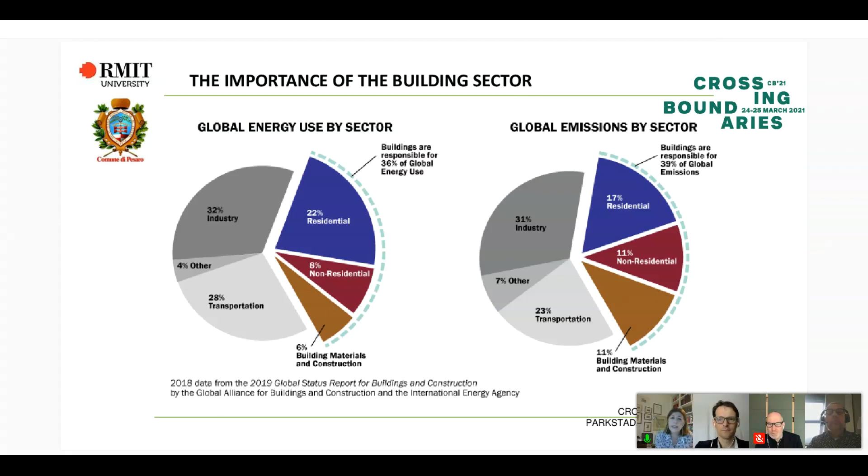Let me give you only some numbers. The building sector alone accounts for 36% of the total amount of energy used, and consequently the building sector is responsible for 39% of total global emissions.

In Europe, the final energy used in the building sector is about 35%, and based on the report of a Copenhagen Research Institute, you can see on the right, in yellow, the building sector's distribution of raw materials consumption, measured in million tons in EU countries. Italy comes only after Spain, Germany, and France.

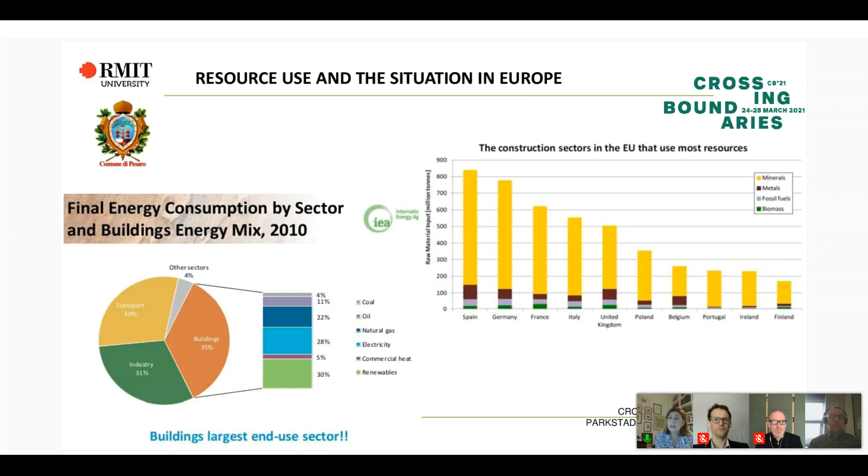With about more than 550 million tons, and furthermore, rising living standards and population growth will push the use of raw materials to unprecedented levels in the coming decades. According to projections from the OECD report published in February 2019, the use of sand, gravel, and rock will nearly double by 2060. Over half of all current greenhouse gas emissions are related to materials management activities.

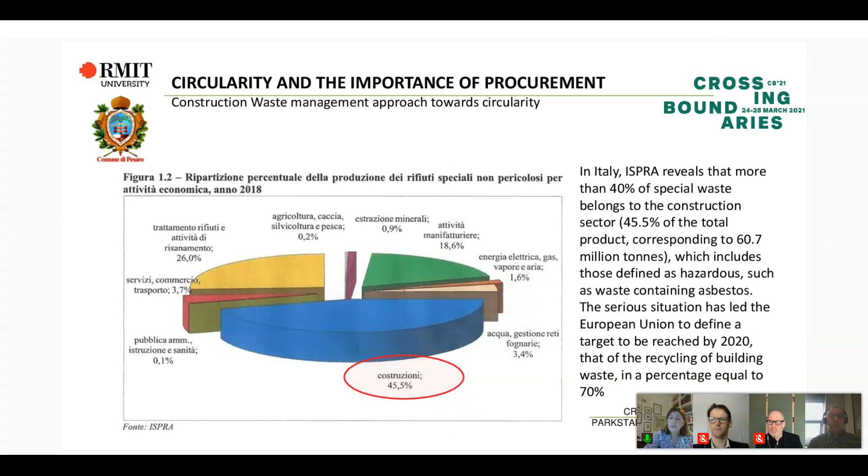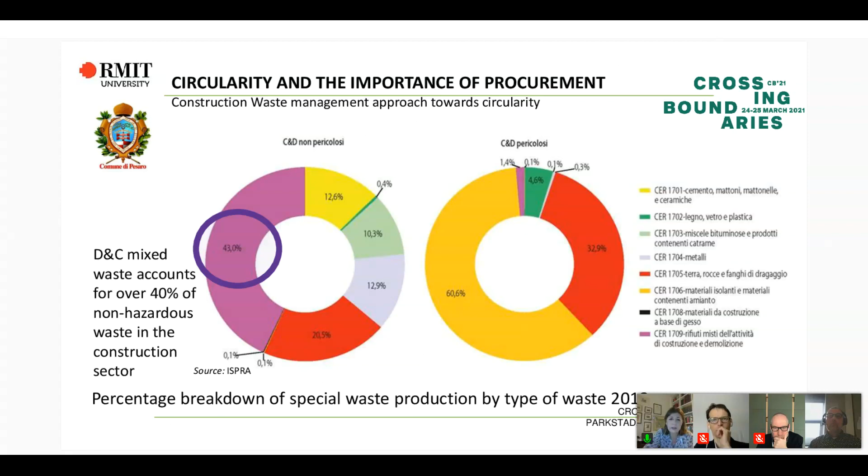In our case study, we did not simply apply waste reduction or maximized recycling, but applied the principles of the circular economy, developing waste management to trigger a process of control and monitoring of all materials and waste during the construction phase. Our research showed that changing the traditional approach in green public procurement can obtain significant results, adopting a more circular approach based on thorough analysis and environmental claims, to achieve not only energy efficiency but circular buildings with low environmental impact.

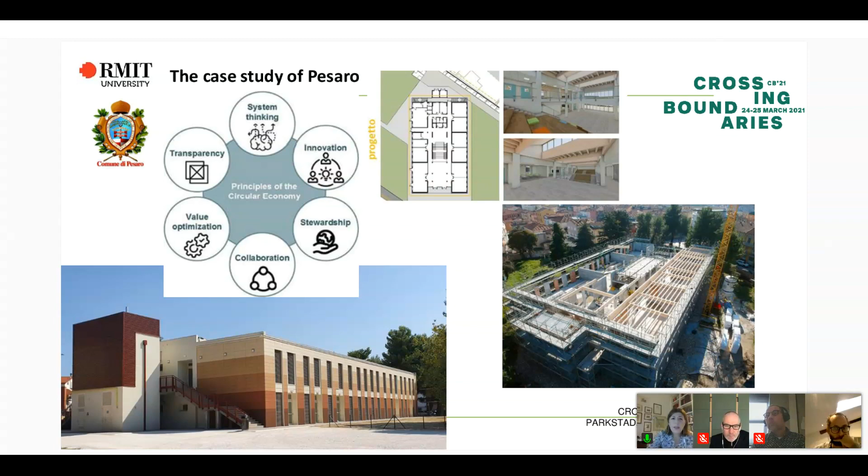So the aim of this project is to go beyond resource efficient use and cleaner production since the design phase, during the construction phase, and based on the tendering process. What's more important is that the call for tender describes a clear technical specification and provides measurable requirements against which the tenders can be evaluated.

Performance-based criteria describe the expected results, which outputs are mandatory. In the case of this project, two main criteria were selected as mandatory: first, obtaining a near zero energy building school, and second, providing environmental energy certification using the LEED scheme, achieving at minimum LEED gold certification. This is the first Italian project that approached GPP with a clear, ambitious request of environmental criteria.

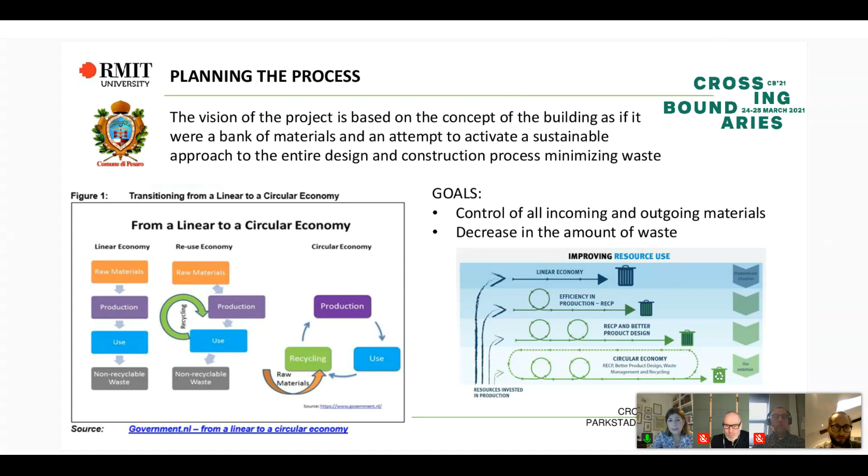As regards waste materials, the strategy was developed by controlling all incoming and outgoing materials from the construction site. The importance of the green public procurement was to make mandatory the obligation to deliver all materials from demolition to a recycling center, and also provide not only certificates proving the quantities delivered to the recycle center, but also the quantities recycled.

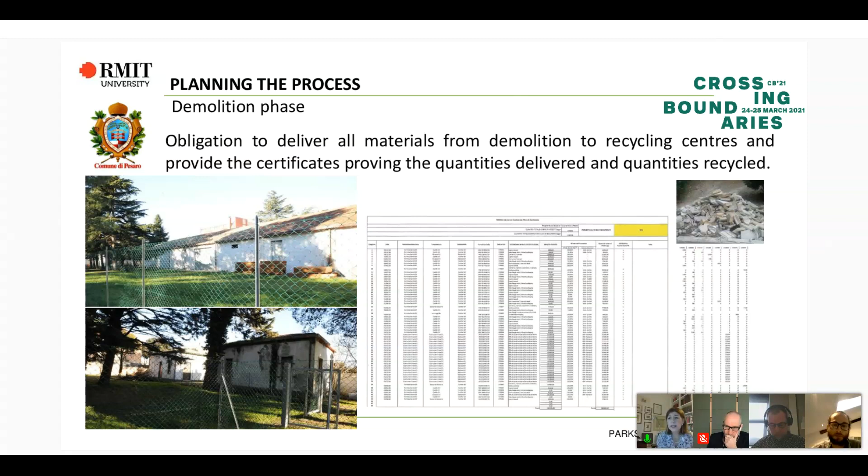Sorry, just another 1 minute, 2 minutes.

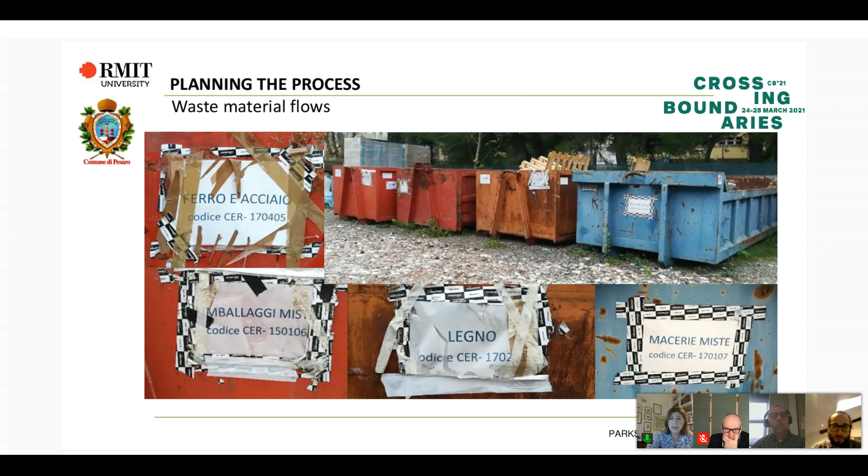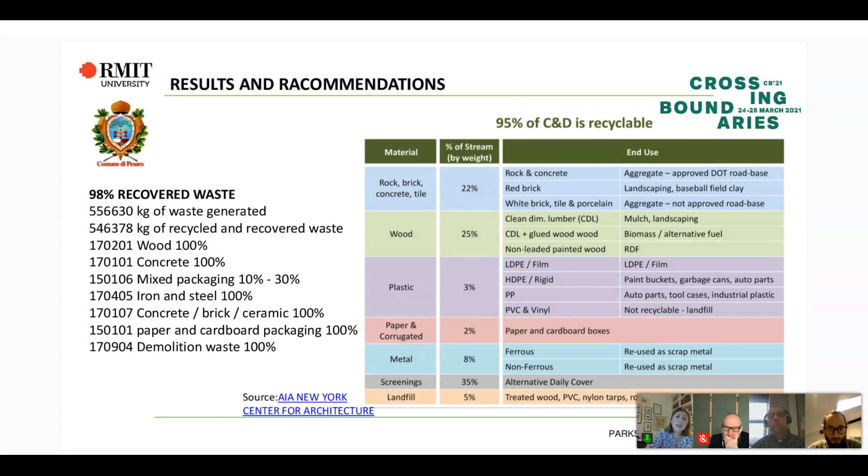Okay, very briefly, based on these clear requirements, the construction was provided with separate waste collection tippers, as you can see in this picture. And here, during the construction site, you can see the amount of recovered waste material, which is about 98% of materials recovered.

And then I go straight to the conclusion. A center for storage of materials used in paper recovery and metal collection was activated locally, and another center for the recovery of inert material from demolition, also locally.

And in conclusion, according to our study, I would like to sum up my main points. Implementing circular procurement means going beyond the lowest price. At the award stage, contracting authorities can evaluate the quality and circularity aspects of the tenders using predetermined award criteria.

Planning green procurement for works is essential for delivering environmental and social value, retaining economic benefits. Finally, I would like to highlight that GPP can be seen as an important enabler for the development of a holistic approach for supply chain collaboration in closing and slowing resource loops in the construction sector.

That's it for my side, and thank you for your attention. Now I am happy to answer any questions you might have.

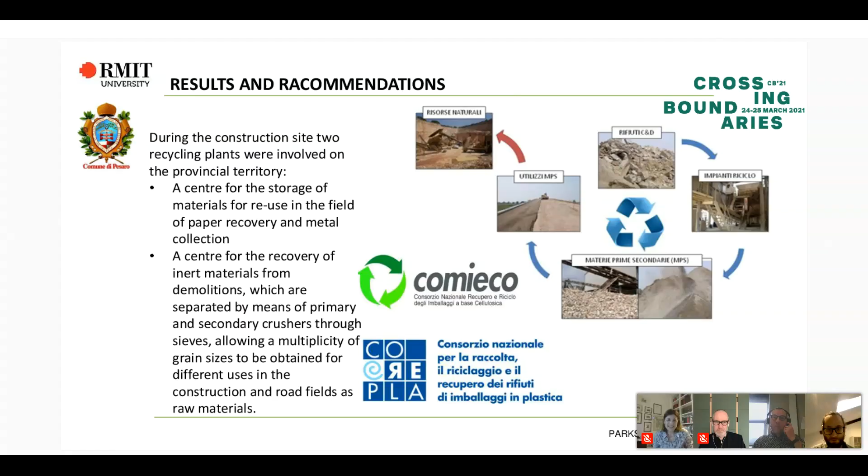Yes, thank you, and sorry for the inconvenience. Thank you, Margherita, for jumping in here. I actually mixed up the two presentations I'm giving today. It's actually the same picture, but it's a different story. The other story is more about the concrete, and this is about the complete project. Very interesting, Margherita, as well.

What you showed is that the potential of circularity is 95%, expressed in mass, of course. We did some additional calculations as well in the field of environmental impacts, to see what is possible if you start harvesting from a project. Let's go to the next slide.

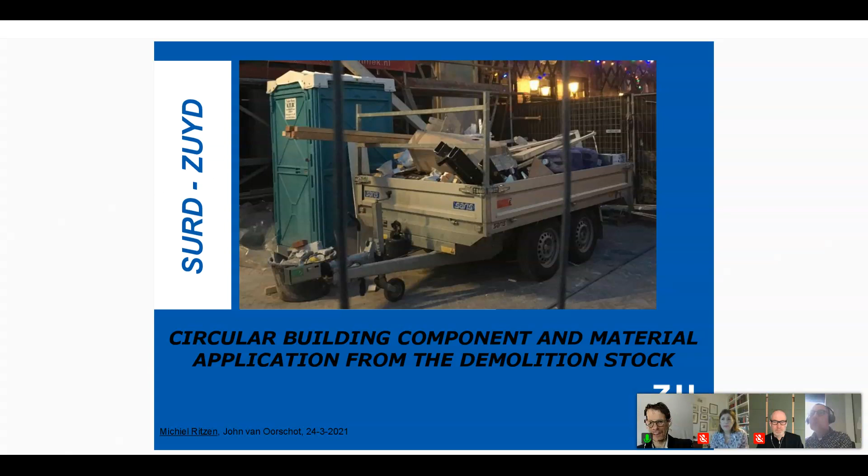So the background, I think Dario already sketched it very nicely. We are facing serious challenges towards a highly decarbonized built environment. So we need to focus on zero energy, but moreover, including the material aspect of becoming 50% circular by 2030 and 100% circular by 2050. Moreover, in our region of Parkstad, we have a significant demolition assignment: about 10,000 dwellings will be demolished, and 150,000 square meters of utility and retail.

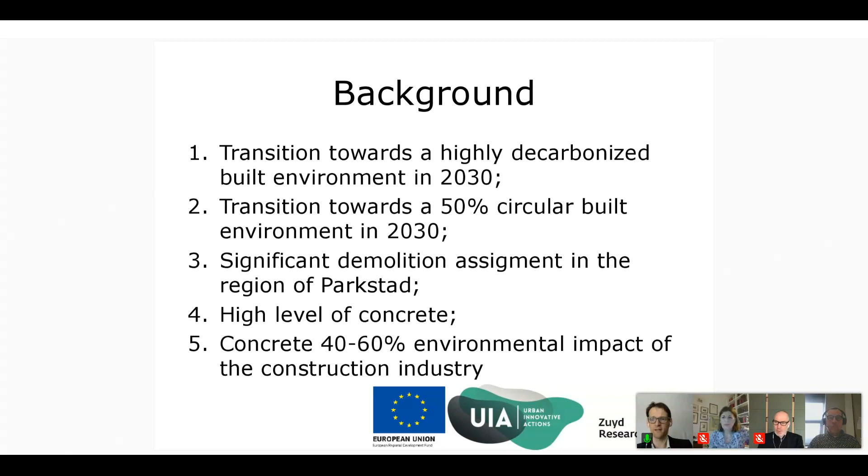And we see a high level of concrete as well in those projects. At this moment, the recycling rate and circularity rate are really very low. We see only about 3% of demolished materials going back actually to building construction, yet people say that we already recycle about 95%.

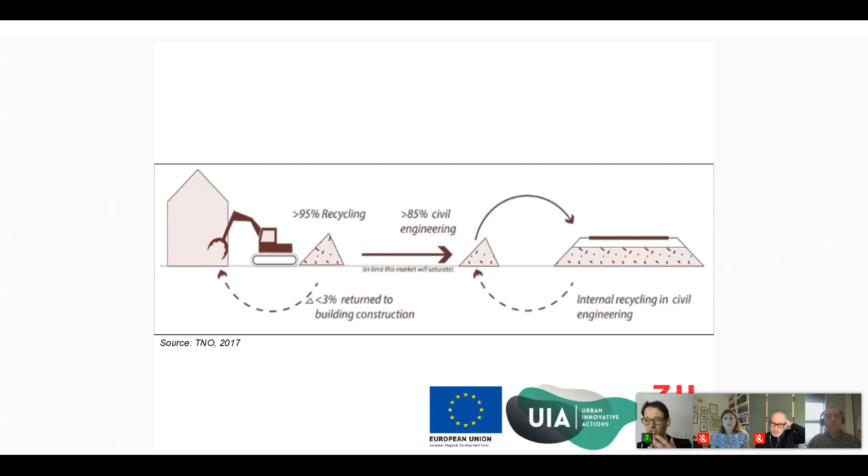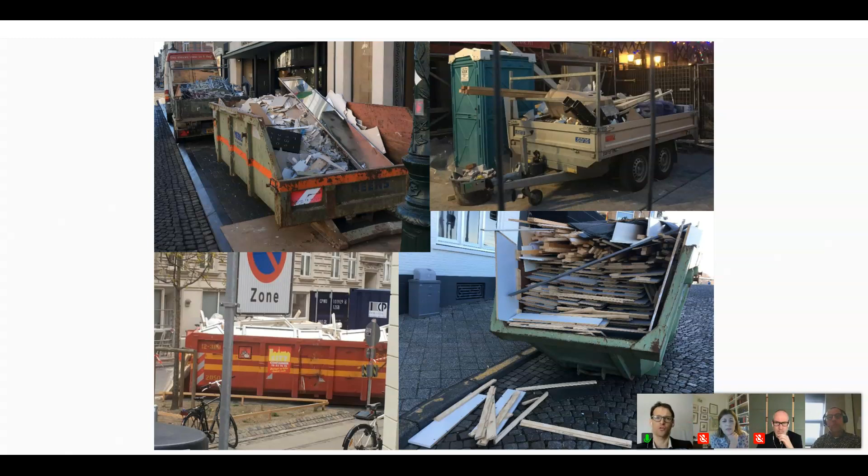85% of that mass is going into civil works, and that's actually not recycling, it's downcycling. We use materials on a lower level, and this is very typical of what we do with demolished materials. They end up in these garbage bins and then are downcycled or completely destroyed. So we need to change that. How can we change that?

Well, we use this 9R model. The numbers fluctuate a little bit, but the most important thing is to start rethinking what do we really need, and then redesigning, and then from the user phase, think about reusing, repairing, and recycling. And that is what we applied in this project, Super Local.

We had 4 of these buildings. Probably a lot of you saw some presentations about it yesterday as well. These buildings would be traditionally demolished, but we said, let's apply this model and see, can we harvest materials to build new building objects?

So we did it in 4 or 5 steps. We started with an experiment, the Expo building. After that, we scaled it up to 3 pilot dwellings, and then we scaled it up to 15 single dwellings.

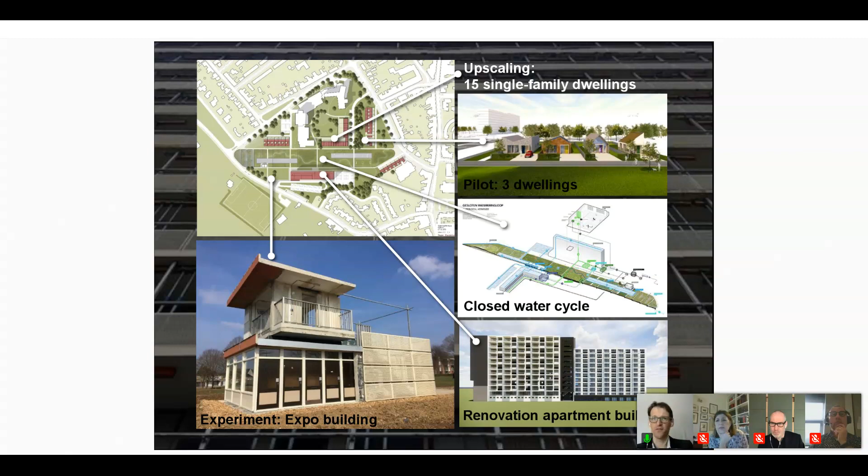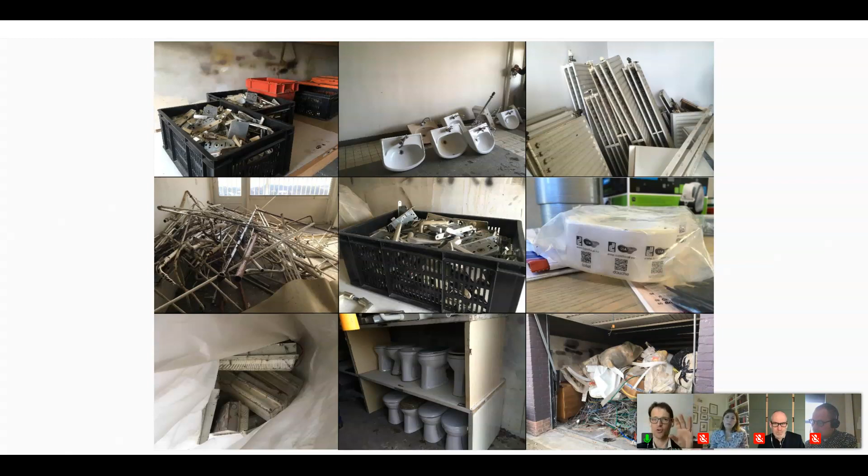We started first with an inventory of these apartment buildings, so we know exactly what is in it. All these components, we made QR codes for them. We put about 10,000 QR codes in the project, and we did an environmental impact calculation, which you can see very briefly here. So we know exactly what mass is in the building and what are the environmental impacts.

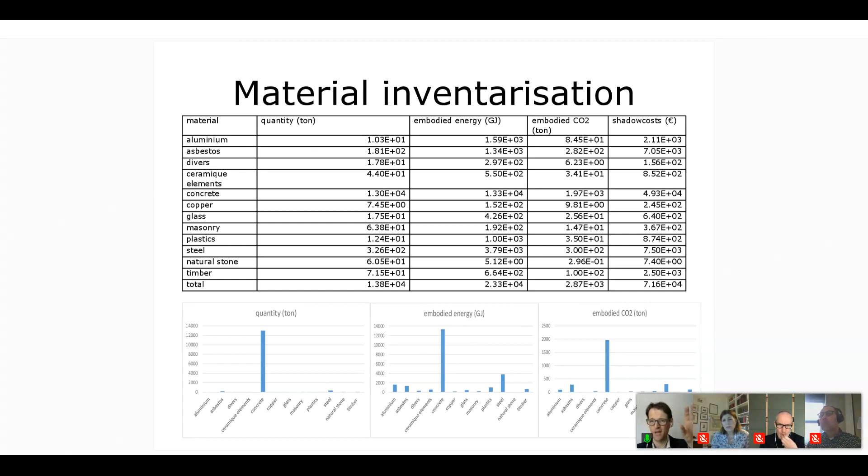And in the graphs below, you see that the concrete is really the main element. So that's a very good point to focus on.

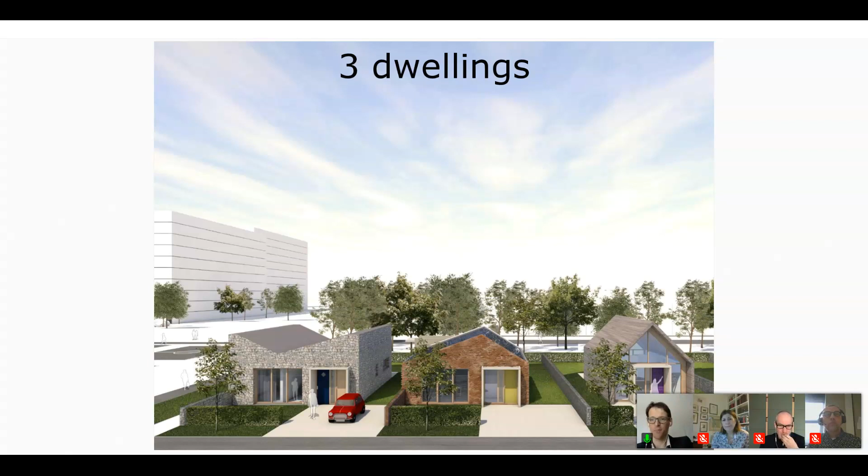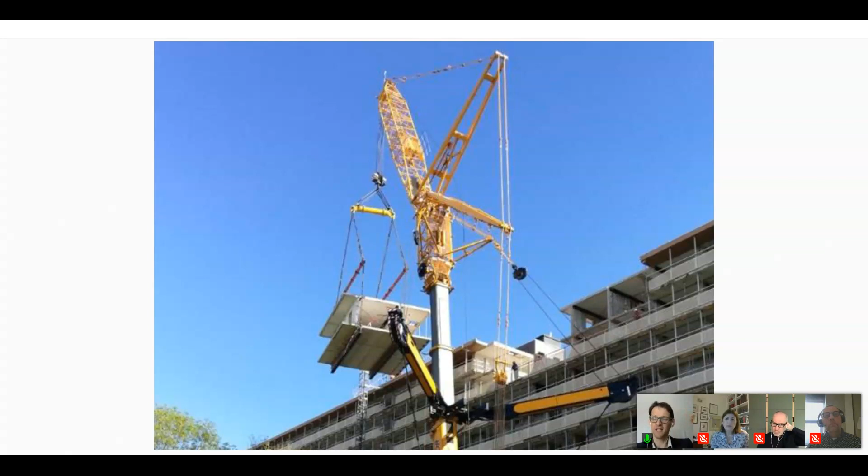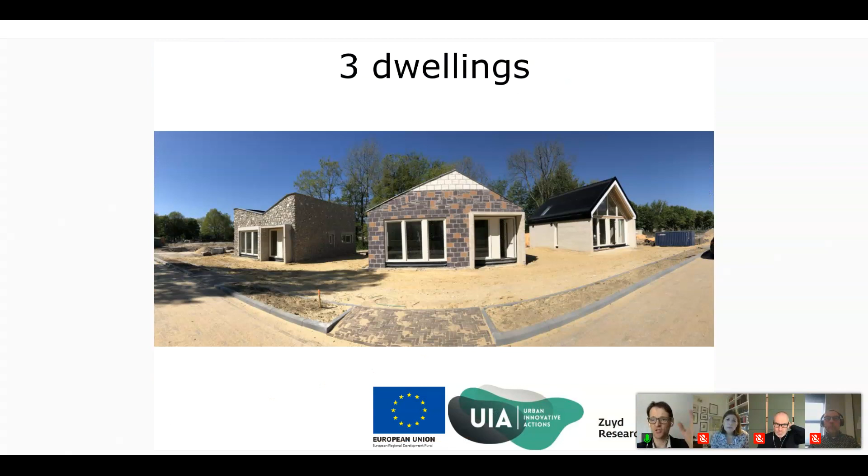From that point, we developed these three dwellings. In the back, you see the apartment building. In the front, the three dwellings. They're now completely finished, and we reused and recycled a lot of concrete. The maximum we did is we harvested these complete apartments, hoisted them out, put them on new foundation, which you can see here, and then we finalized the dwellings, and they now look like this with different cladding materials.

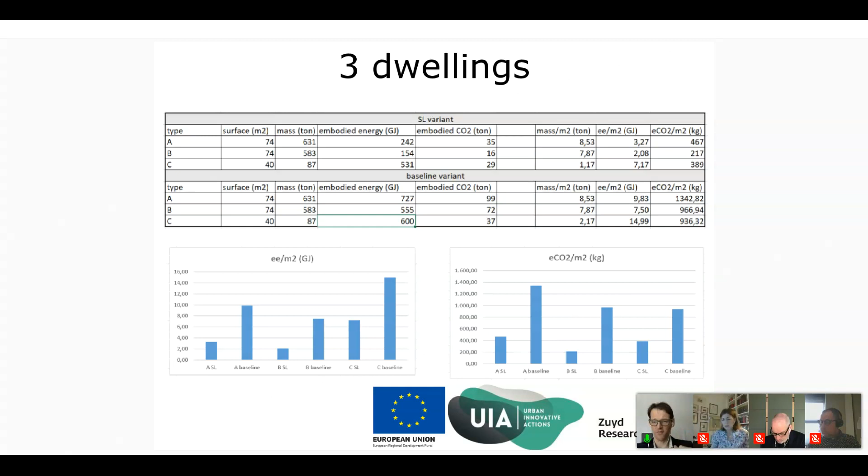We did a comparison between these three dwellings and new dwellings. What you can see here, especially in the graphs below, in embodied energy and embodied CO2, we can really save about between 60 and 70% of embodied energy and embodied CO2. So applying this method really results in a lot of environmental impact gains.

And later on, another presentation will go deeper in this aspect. So concluding, and I hope I'm still within time.

So we did this inventory of what is exactly in this apartment block. We see a lot of embodied energy, a lot of embodied CO2, and in our current linear processes, they're completely wasted. They're downcycled and they're not used anymore on this high level of quality.

So if we look at what's actually possible, we can harvest 50 apartments from this big apartment block to construct 50 new dwellings. And by doing so, embodied energy and embodied CO2 savings can reach over 65%.

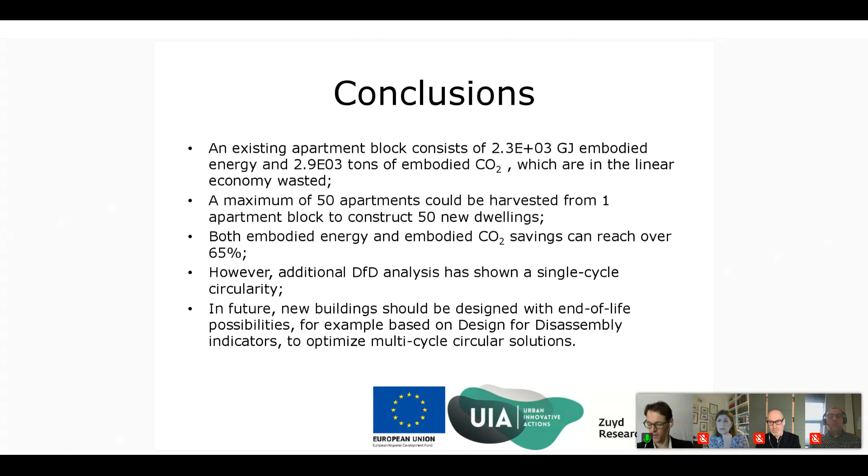The third talk is about circularity in selected European Union countries, the case of construction and demolition industry. And the presenting author is Dr. Norman Dytianquin.

Sorry, okay, let me share my screen. I don't know if you can see the screen. Not yet? Okay. Yes, there it is. Okay. So, no, it's gone. Oh. How do you do this? So let me see. Window and share. Okay. Yep. Can you see anything?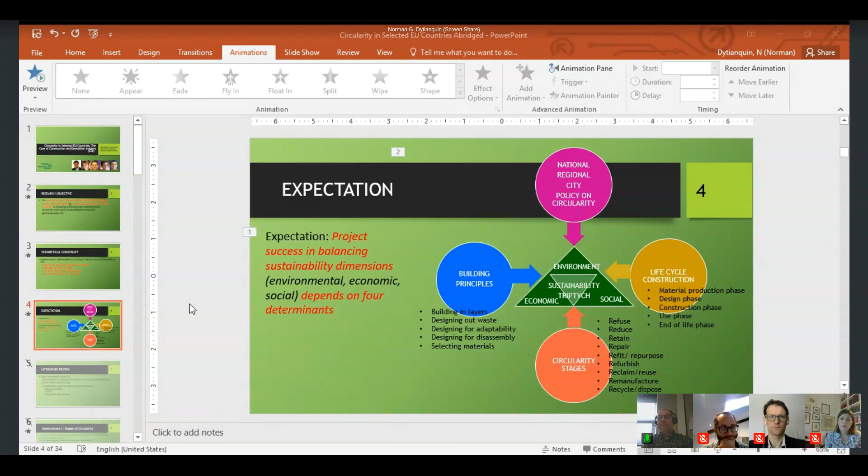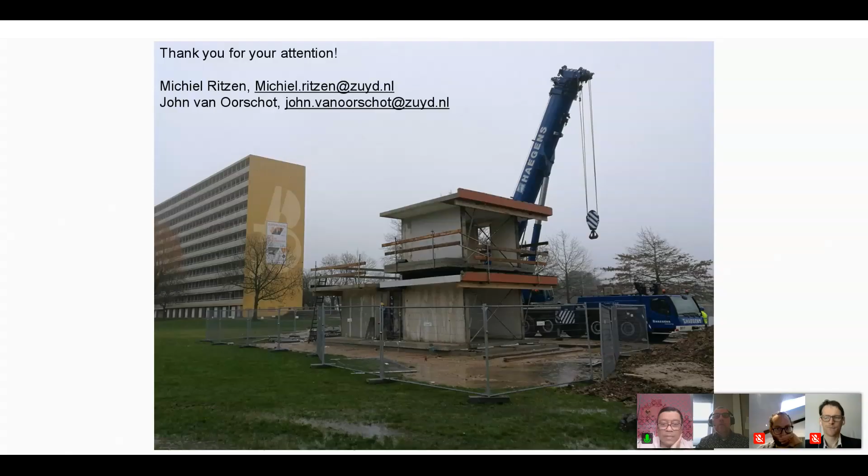Sorry to interrupt, but we still see the first slide. Oh, the slides are not running. Okay, sorry, I thought it was working. Let me share this properly. Just look at this, to show this, okay? But do you see it? Yeah, now we do see slide number 4, I guess. Yes, okay.

So essentially in slide number 4, I am showing the mind map of what we're trying to do. These are the determinants: you have the policy, you have the building, architectural building principles, you have the life cycle of construction, and you have the 9 R's, the circularity stage.

And now I move to the methodology. So we looked at the criteria for choosing the countries: the availability of data in terms of project description, the interim or final assessment reports of the projects, the existence of project websites, and reviews in architectural digest and journals of these different projects. We also made sure that the different projects represented diverse elements of the determinants.

I have a slide on this later, we can look at it. So not all of them are in the same life cycle of construction, not all of them are using building in layers in architectural design. So they have different stages. We also look at the availability of country strategies, and finally, the countries selected belong to the top 10 waste generators inside the EU.

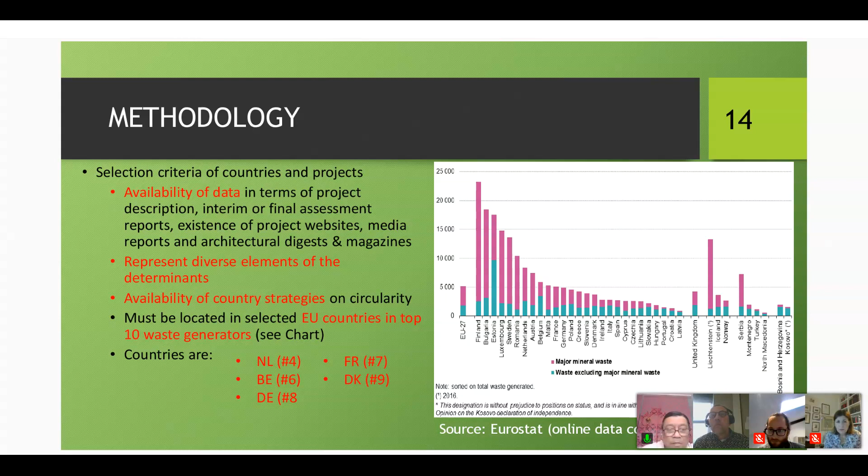So the projects we chose are: the Superlocal project, which Michiel just explained earlier, involving demolition of apartment blocks and creating 100 new homes. They use three construction techniques, reusing the entire hull or shell of a studio and supplanting it again on land for reuse. They also tried to remanufacture stackable bricks that can be dismounted later, and tried to upcycle concrete rubble into new concrete to be used.

The other project, in Belgium, is the Circular Retrofit Lab, which involves student housing inside the Vrije University in Brussels. This also involves the use of prefab modules that can be rearranged in spatial reconfigurations, which they call reversible solutions.

Then we have in Germany the Open Air Library, a community endeavor started by residents to reclaim abandoned industrial land in East Germany. They created the library using beer crates as building materials and donated books. Everything is public, so they all donated money to do this, and they were also responsible for designing the library, as you can see from the small picture there.

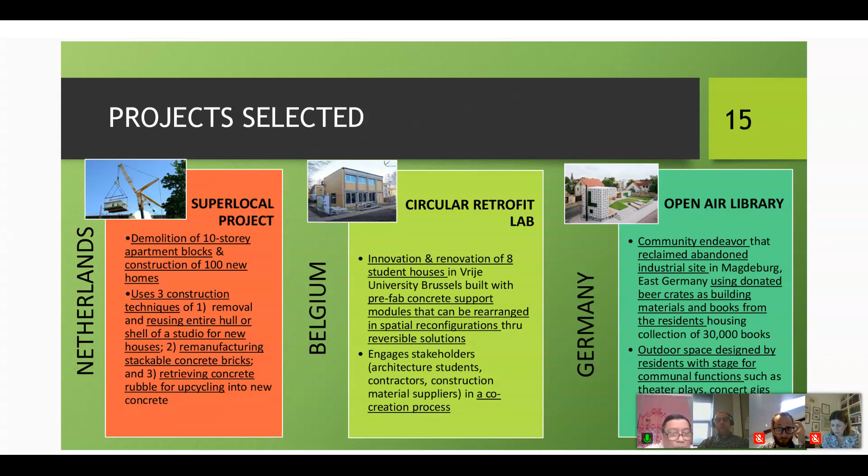The next project is in France, the Réhafutur Engineers House. This belongs to a typical mining house in northern France, a UNESCO protected historical site. It involves refurbishing the whole building, converted into office spaces using eco materials as insulation. They also try to protect the cultural heritage, so you cannot touch the facade of the building—you can only work on the interior.

And the last project is in Denmark, which we call Upcycle Studios. There are 20 terraced houses using recycled or remanufactured materials. So based on this—this is too fast now.

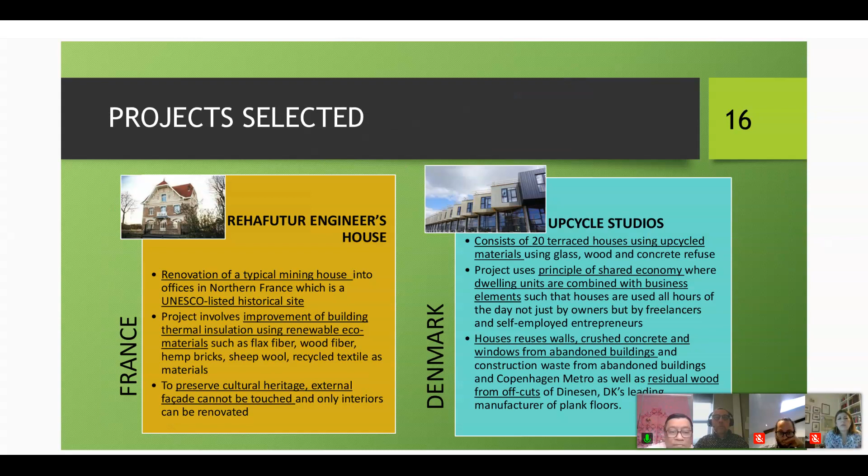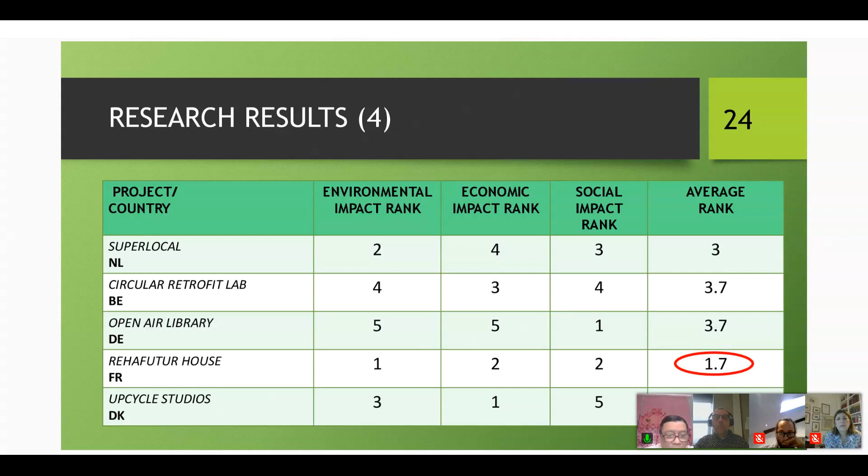So based on this, we have the results, and the best project that balances environment, economic, and social impacts is the Réhafutur House of France. It's called scored - we rank them from 1 to 5, with 1 being the best. And of course we average them, and it ranked the best.

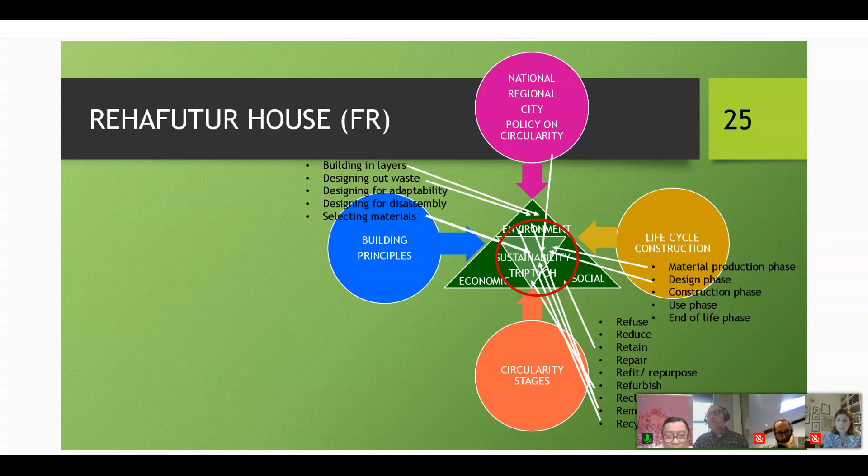So it balanced the 3 dimensions. Using the mind map, we see that all these dimensions targeted the middle, which is the balance of environment, social, and economic. If we look at the German project, they focus more on the social, so they are on this side of the diagram.

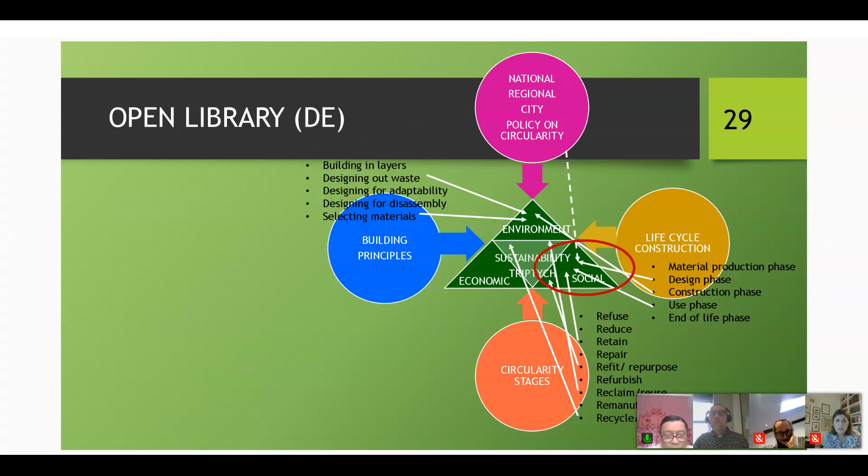And then finally, we have the key takeaways from this research. CDI projects should actually strive for the balance of sustainability dimensions, and not just environment or social or economic, but actually the balance of the 3. And then we need the presence of national strategy in providing direction and impetus for circularity, so that the mindset and mentality takes root.

In fact, one of the projects in Germany, they didn't have any strategy. So they even hired Netherlands to do consultancy work to create a regional strategy in Bavaria.

And the project can address more sustainability dimensions if, these are the conditions, the higher the circularity stage, such as remanufacturing, refitting, refurbishing, retaining, then the more you can address social and economic impacts. And then the next condition is the design principles: building in layers, building for adaptability, building for disassembly. Here you can put in a lot of economic and social dimensions of sustainability.

And finally, the design and use phases of the construction life cycle - this is also where you can put a lot of economic and social, and not just environment. So that ends this presentation. Thank you, I hope I was on time.

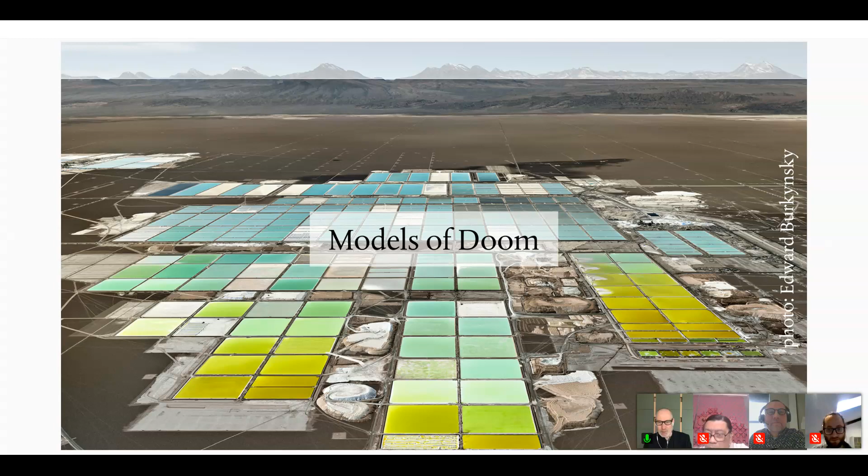First, I would like to start with models of doom. That is actually what was named in the newspapers, the research done by these 5 people. They were later called the Club of Rome, but these 5 people at MIT - you should remember these names because they really changed history. These 5 people had this insane idea.

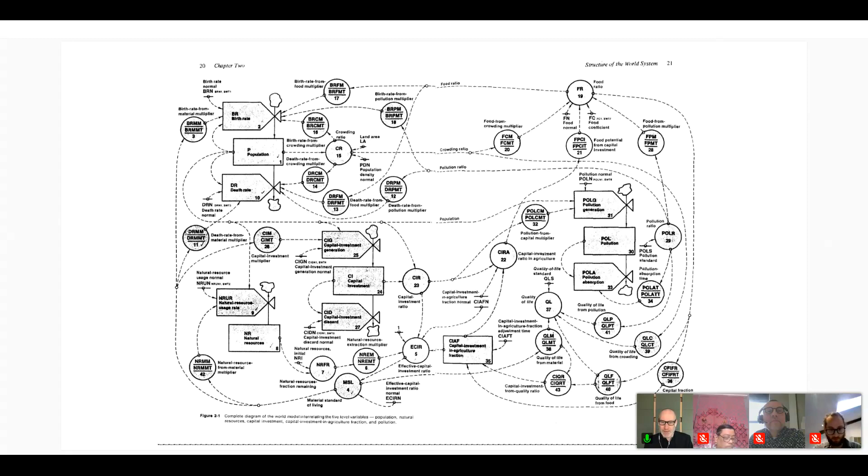Let's make a computer model of the world, a computer model of how the world acts and human behavior in it. And it was called World 3, which is a very funny name for a computer model, also very boring. And this was the computer program.

What they found - I will not go into it - is that they put in all the data of pollution, economy, population, resources, from the year 1900, and then predicted according to 11 scenarios what would happen if mankind would move this direction or that direction. They had one stupid scenario called the normal run, the standard run, the business as usual scenario, meaning mankind would not change our behavior. Then, in 2014, you can see this standard run scenario would inevitably lead to a collapse scenario in 2070.

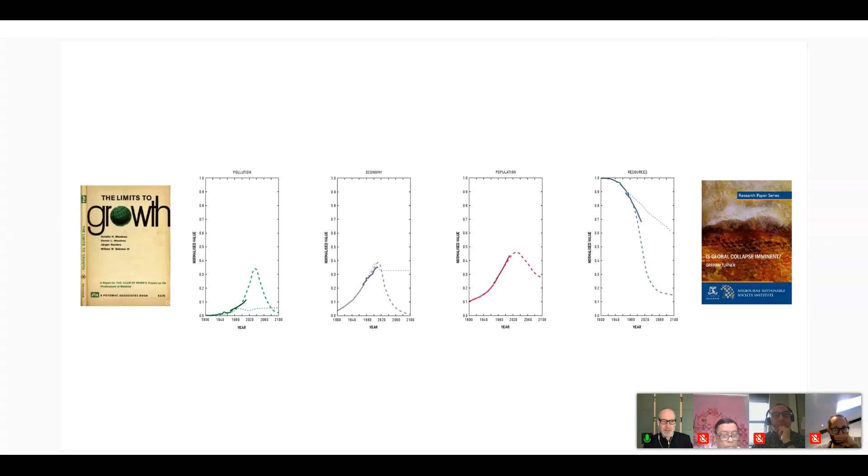So they wrote it in 1970, collapse in 2070, so 100 years to go, 100 years to save the world. And then an Australian professor found in 2014, he thought, okay, let's see what happened after 50 years. And he found out that actually we are doing the standard run scenario. So down we go.

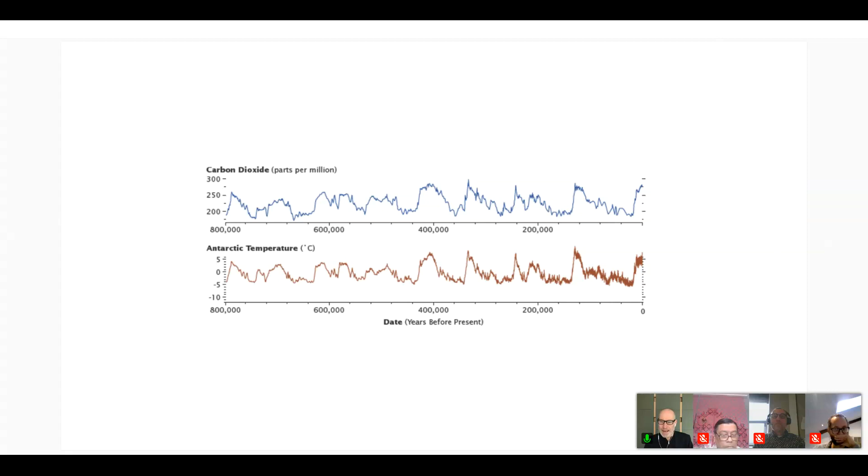Of course, you could see this as a very harmful and bad message. Some people will say the Earth will die, but of course this is not the case. The Earth will not die. We have had these levels of carbon dioxide actually a lot in the past, high levels of carbon dioxide, high levels of temperature. The Earth will not worry. The only thing that will happen is that we will destroy mankind, but Earth wouldn't mind so much.

This has led to the Anthropocene. I don't have to explain you so much about this because you're all experts, I imagine, but this Anthropocene means that mankind, human people, have a significant or the most significant influence on the behavior of the Earth.

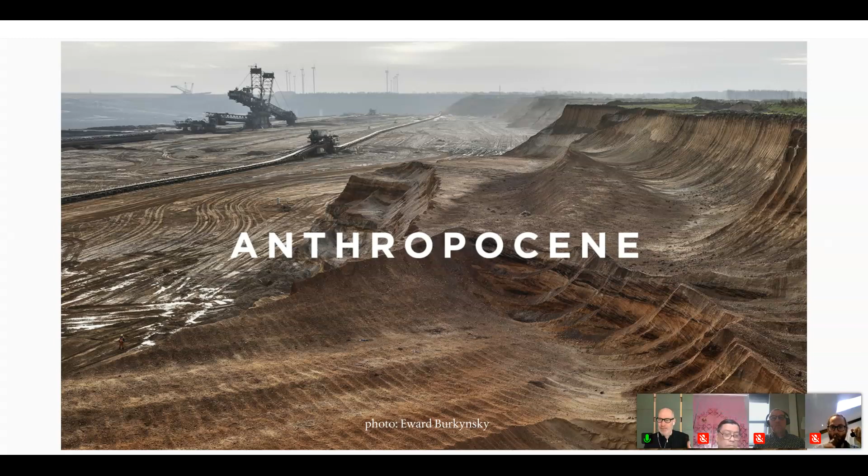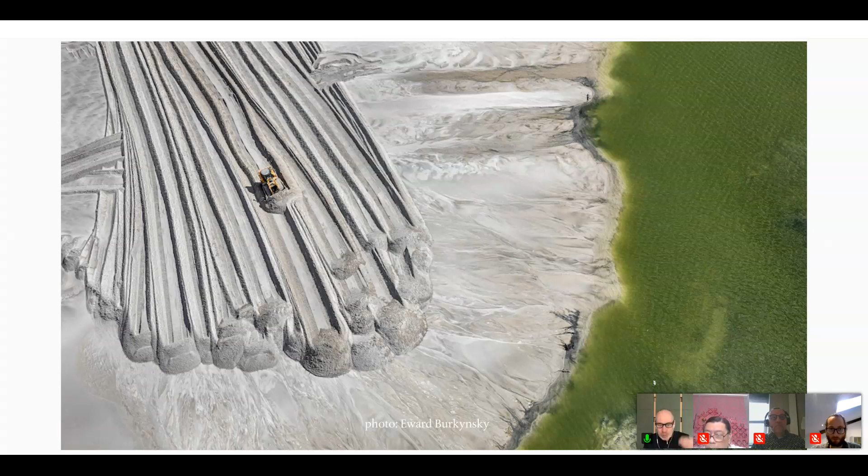Instead of going into this, I would love to show you some images that are made by Edward Burtynsky, and I asked him for permission to use these images in presentations, and he was so kind to do so. It only shows what people do to this planet. And actually, these images are so beautiful that you make them love human activity, and it sort of almost implies a weird fascination with beautiful images of the destruction of our Earth, or of mankind, that said.

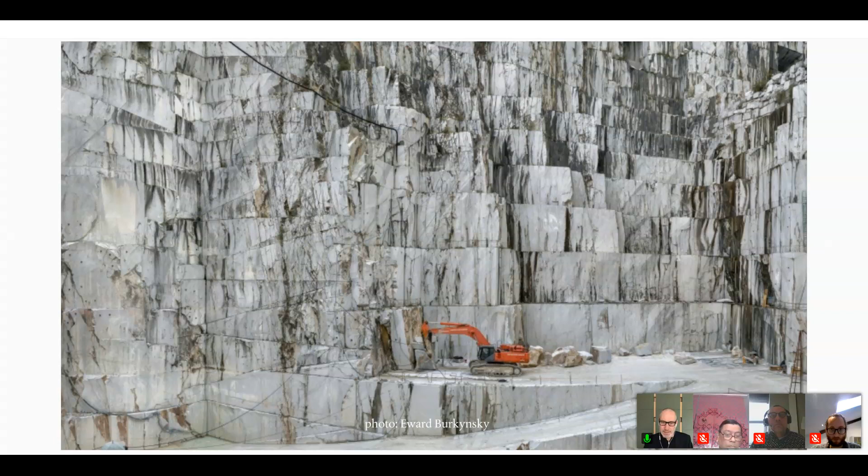And you should see his movie. It's called Anthropocene. I can really advise you to see this movie, because it's a beautiful way of showing what we do to this planet, aesthetics and destruction.

So I will show you two examples that we did with friends and colleagues and researchers and so on, two heroic attempts to build from scratch, because we have to invent a new system logic. We have to invent new ways of dealing with stuff.

And the first project we did was we started recycling plastics, household plastics. By making these images, what you see here is waste, nothing else. What you see here is waste, and by photographing them in this way, it almost reveals already some kind of a beauty. You could imagine when you see these images that it's not waste, but it might be raw material. Of course, we didn't know how to do it, but it might work.

And this is not the ordinary way that we show waste. This is the ordinary way that we see and produce waste. It's going to be piled up and then mostly recycled, as they say, but most of the times recycling means burning, putting them into fire. And it's called caloric recycle, but this is of course a bit of a joke, because it's not real recycling, it's just burning them.

And then we had this fantastic idea. We said, okay, we are going to use all this plastics because it's good material and turn them into a building material, into a sustainable building material. And then we went to all the factories, this is a few years ago, saying we have this great idea, we're going to use your machines to make this building material. And then everybody told us, your waste, your stuff, your garbage is not going to be in my machine.

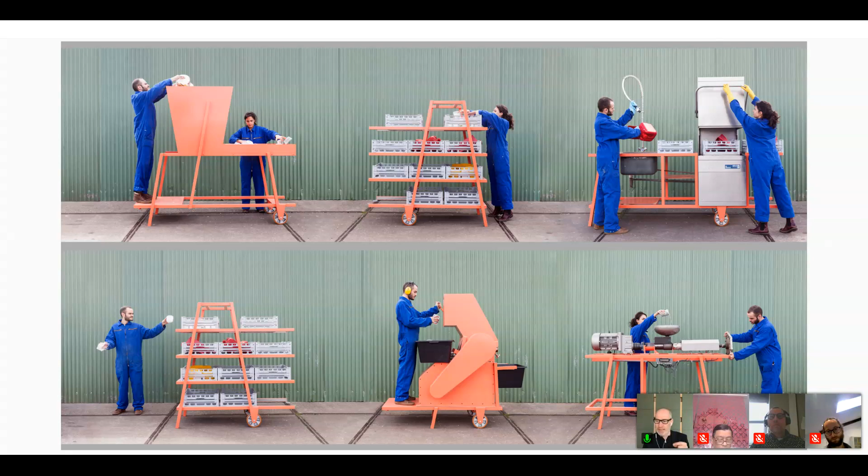So we had to make our own machines, and that's what we did. We made these machines that are not very unique by themselves. It's collecting, sorting, washing, drying, shredding, and molding. Each of this machine represents an industry, but these industries never talk to each other. So the only thing we did was we connected industries on a very small scale. And this was the first project that we did.

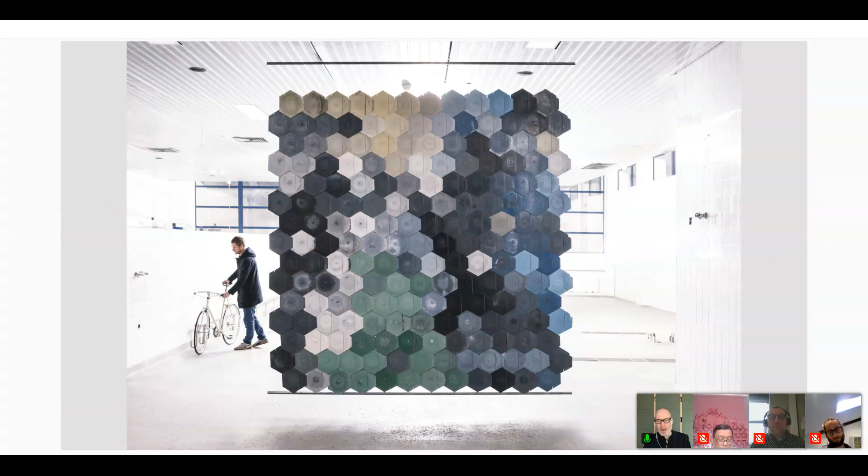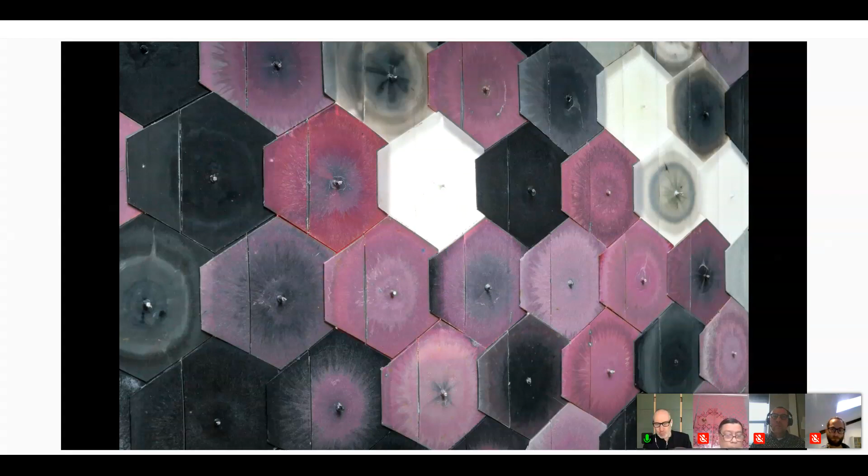What you see here is 100% waste, plastic waste that is also in your garbage bin. And we didn't change anything except for this sequence of procedures. And we, of course, loved it. We couldn't believe it was so beautiful. So we were able to make 4 of these little pavilions for the university in Amsterdam.

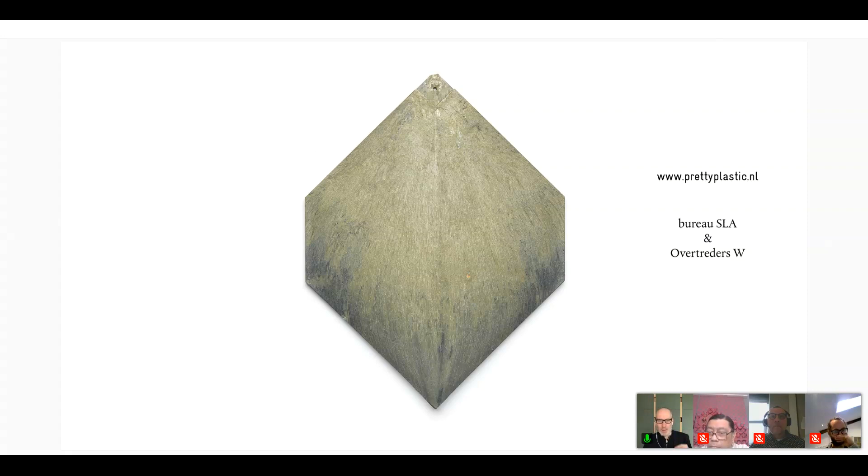So this was a huge success, and we started developing more in this way. And this was the second version of this plastic waste tile, meant to be an obtainable, real serious building product in large quantities. And then we were able to make details, different kinds, and make specifications, and people started using it. So people started using our product as a serious building material that would last 50 years.

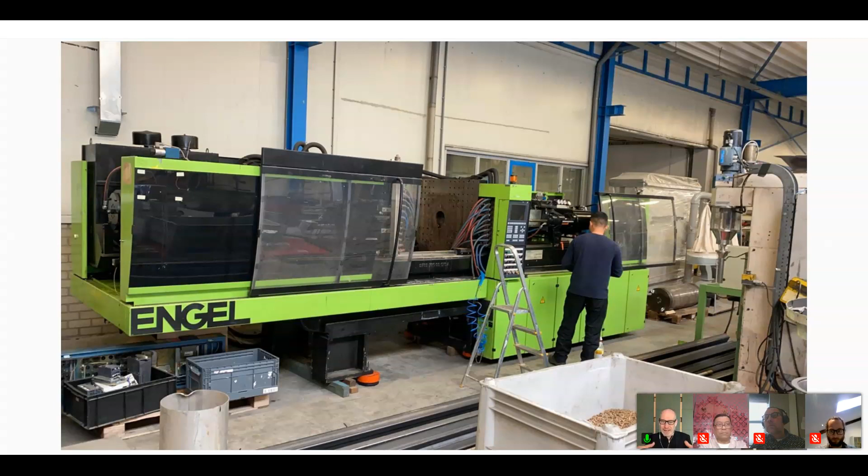And this building material now has all the certifications. It's fireproof, it's all construction proof, so you can have all the papers as well, which is interesting and also needed in a circular economy. It's not about making interesting, nice objects. No, this is a serious business, and it should have large quantities and a bigger turnover to make an impact. It's not about making nice things, it is about making a lot of nice things.

So now we are able to have this plastic factory, and we are able to make 130,000 kilograms of waste turn into a serious cladding material, and have 4 million of quotes already this spring.

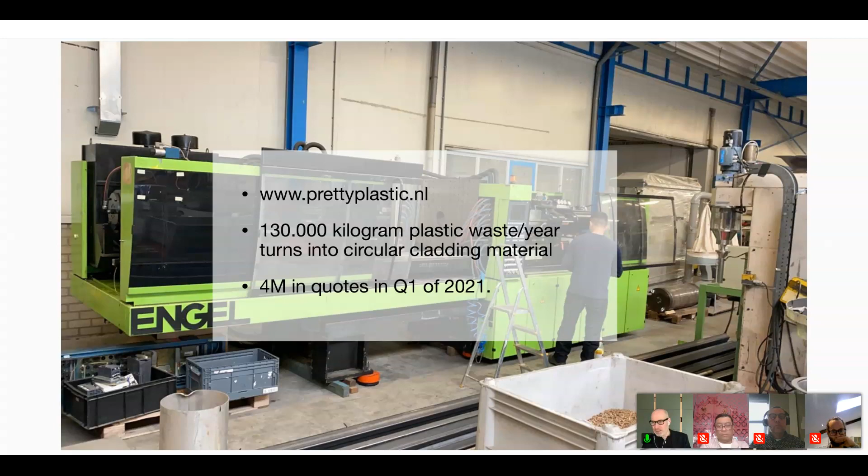So I will skip a bit of my slides because I see I only have 3 minutes more, and I almost managed, but not quite so much. The point I want to make is there is no such thing as a linear economy. The Earth always works circular, and building also did. I will go to the last project.

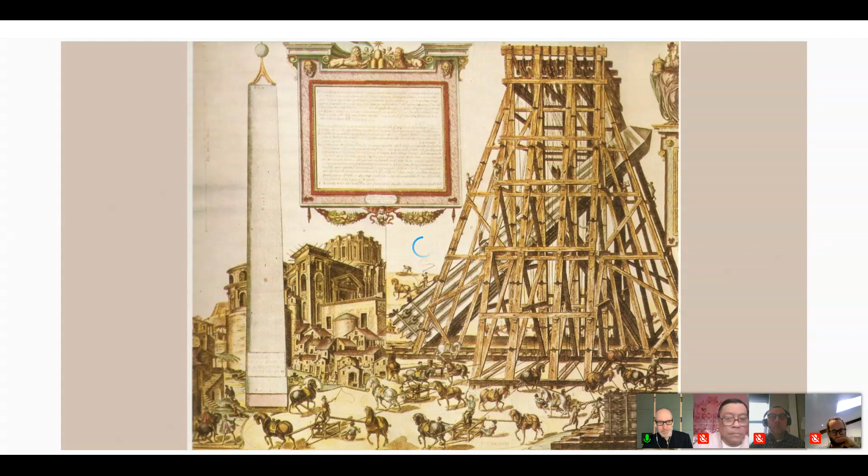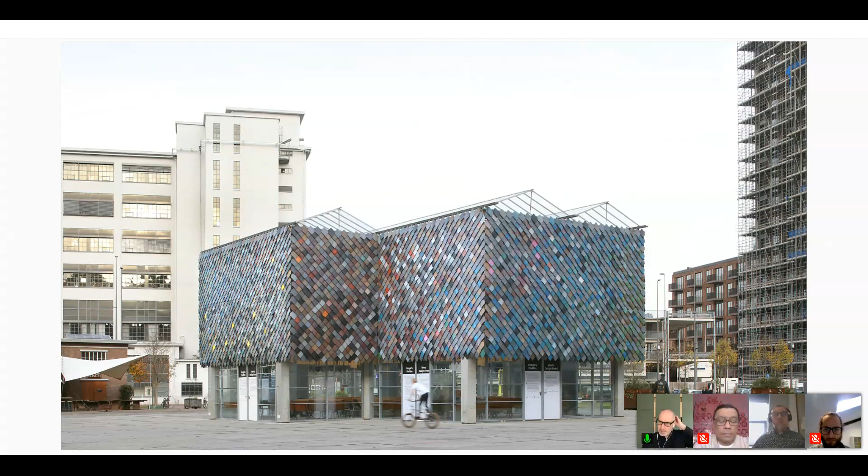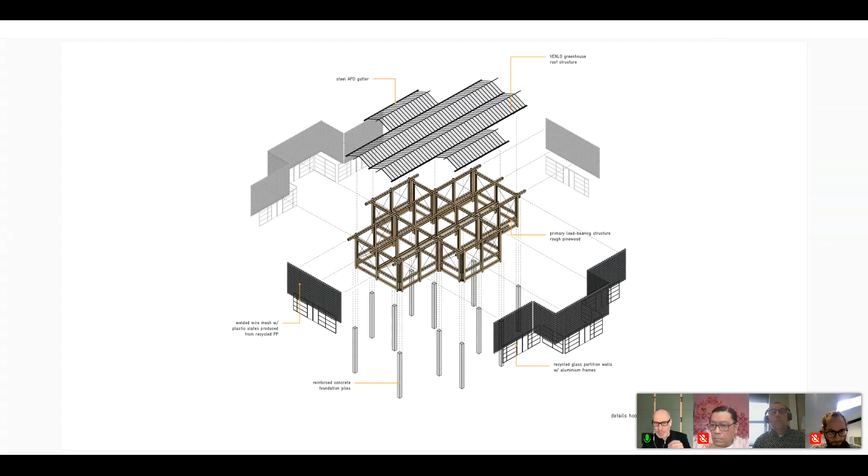out of materials, and you see the tile here as ready. That was completely borrowed. So we borrowed all the materials for 9 days from manufacturers, from people, from everybody. And I will not go into it, I'm sorry, 10 minutes fly. But after 9 days, we gave all the materials unharmed back to all the people that borrowed us these materials.

And sorry, the statement I want to make, and then I will finish, is that if you think about circular designing and circular thinking, it is not just about materials, and it's not even just about construction, but you also have to think about new economic models. You have to think about new processes. I will not go into it, but a circular approach demands new processes. And then you will find new typologies, as we saw in the examples shown before of Michiel Ritzen and Norman. And you will find a new architectural expression in the way we make our buildings.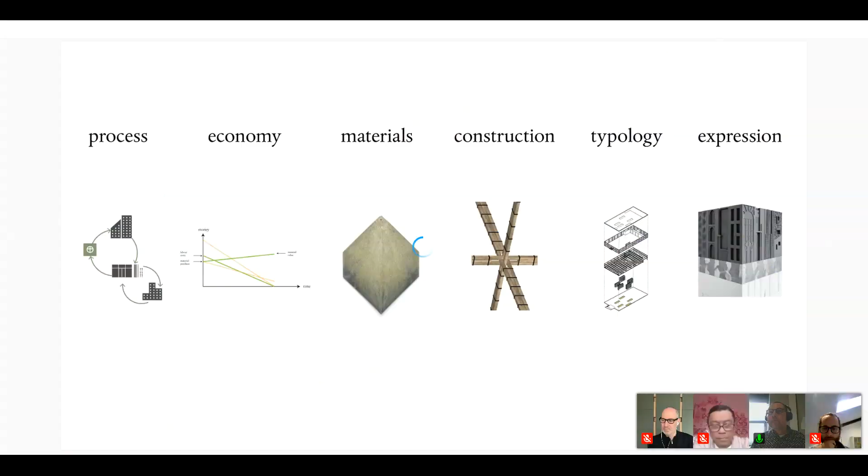You have to unmute, Albin. You have to unmute, Albin. Oh, can you all hear me? Yes, now we can. Okay, perfect. I was having some issues with the button there. It wasn't working, but good morning, everyone.

For those of you who know me, you know me. And for those of you who don't, my name is Albin, and I work with Michiel Ritzen and Mr. John from Zuyd. And for the last 1.5 years, I've been working on the concept of circular business model experimentation for the construction sector. And we worked on 2 projects, Drive Zero and Super Local. And this was what my summary was for the paper that I published in this conference, which I'm very happy to present. And for today's presentation, instead of talking about both the case studies, I would like to focus specifically on one due to time constraints.

And yeah, to give you a description of what we will be talking about today, I give you a brief description of the case, and then I talk about the taxonomy of circular business models we developed during this research project. Then I give you a methodology of the case study assessment, the data, how we assess them, and finally the research findings, the proposal for the companies and the key takeaways from this project.

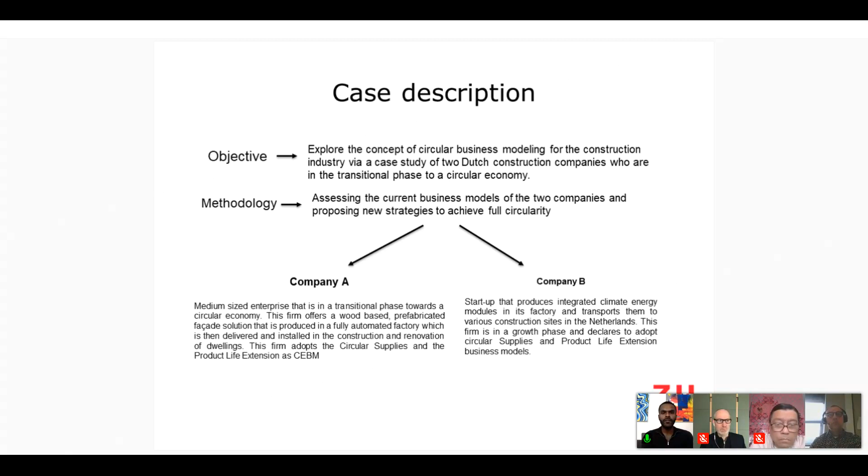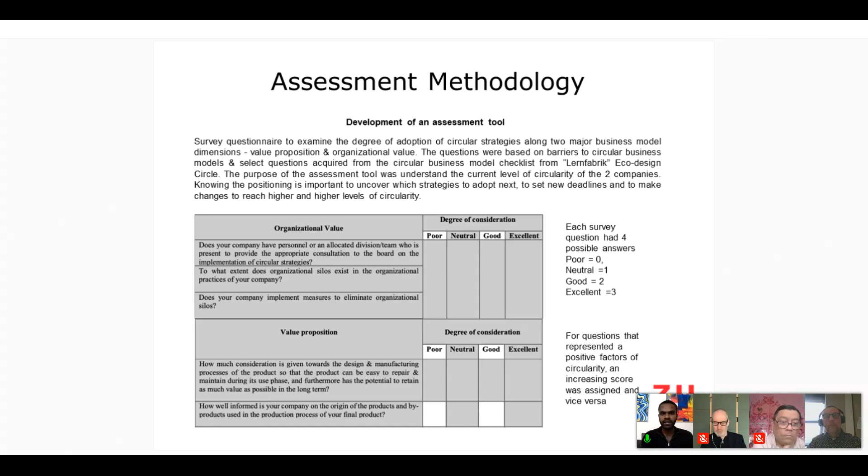Sorry, I really cannot see with the zoom here.

Company A received 47% for value proposition and 62% for organizational value. So what this basically means is that we tallied all the scores for all the questions that were there, and we saw what standing there was. Any score above 50% was considered high, and a score below 50% was considered low. Once again, these were hypothetical approximate estimations, but we just wanted to make it really simple so we could focus on the main part, which was providing them with strategies.

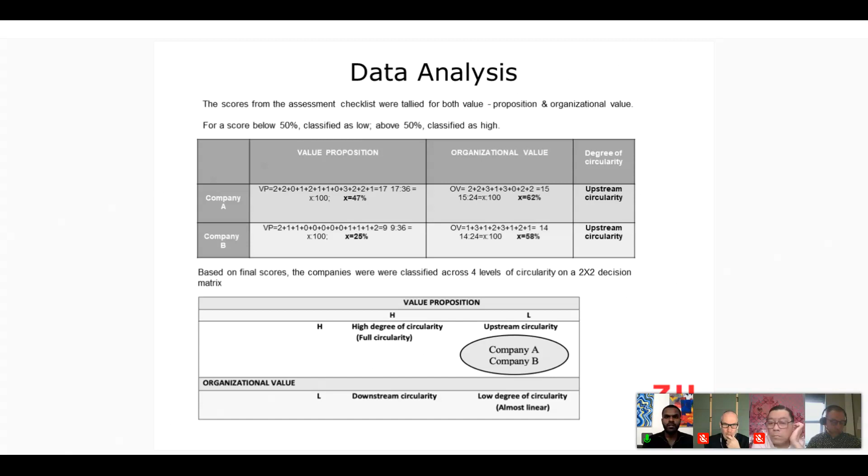Now to give you the findings for Company A, we found out that this company incorporates circular business model strategies in their product design phase, research of old materials, manufacturing and innovation, but they did not transmit these values of circular strategies downstream. So what this means is that their mission to a circular transition does not emerge clearly in their marketing strategies or campaigns and with their customer relationships.

And this is because of two main outcomes. Company A does not provide incentives for its customers for product take-back programs. In addition, they currently are not looking forward to formulating any product take-back programs. Next to that, they miss the crucial aspect of retaining ownership of the product, which if they did would benefit them in a lot of ways, which we discuss in the next slide.

For Company B, it was classified again as upstream circular, as mentioned before.

This company incorporates circular strategies in their design and manufacturing of products, ensuring key aspects like that their products are easy to repair, easy to maintain, and that the products have extended value throughout their life cycle. Despite all this, the company is still not fully circular, and this is because of the following reasons.